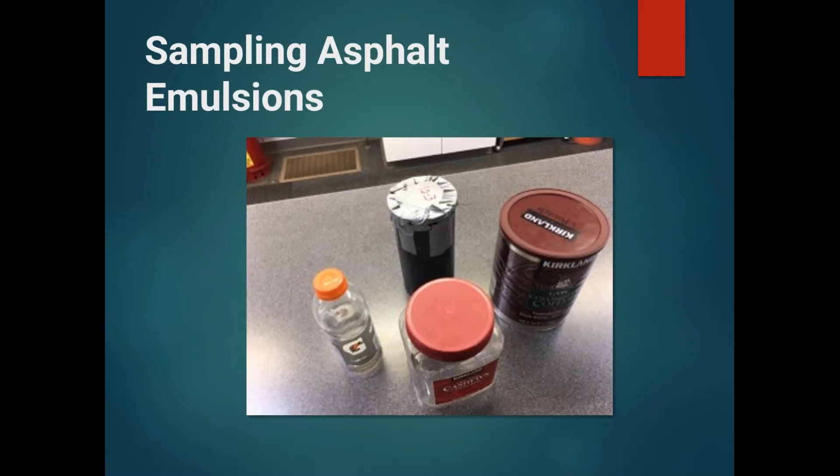The purpose of sampling is really to obtain samples that truly show the nature and condition of the material that's being put down on the road. And test results are dependent upon proper sampling. If you go out and you take a bad sample, you're going to get bad results, and it's not going to truly be a reflection of what the material was that you received or applied to the road.

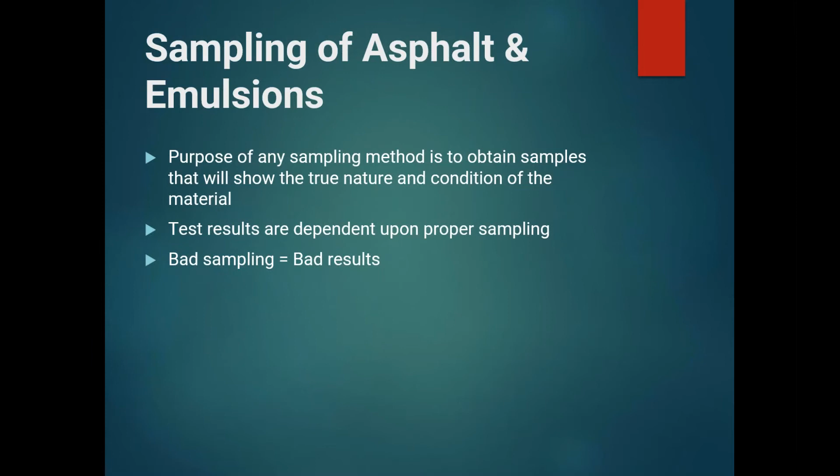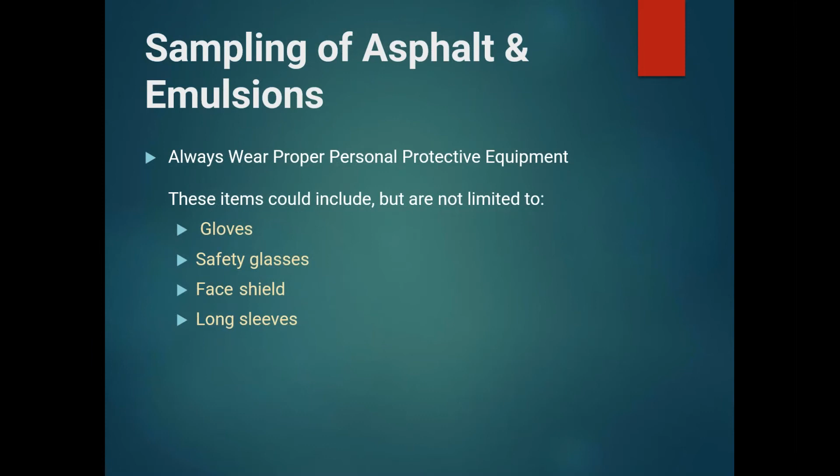So the first thing I want to talk about when you go out to pull a sample is PPE. That's proper personal protective equipment. You always want to make sure that you are wearing the proper equipment to take a sample safely. And those items are usually things like gloves, safety glasses, a face shield, and then long sleeves. Safety is always my first concern.

Now, with just 20 minutes to discuss both sampling and emulsion testing, I'm going to cover the highlights, but for more detailed information, two great sources of information on sampling procedures are AASHTO R66, which is sampling of asphalt materials, and also ASTM D140, which is the standard practice for sampling asphalt materials. Both of these provide additional information on proper ways to sample asphalt and emulsions at production facilities, storage facilities, and the point of delivery.

Most agencies and companies have sampling policies and procedures. And these procedures a lot of times will contain information on the proper sampling location, where they want the samples taken, how often samples need to be taken, the type of containers these samples should be taken in, and also PPE required. So when you're taking samples, make sure that you are meeting and understand the requirements of the applicable agency or company that you're pulling them for.

Andrew just spent some time talking about the production facility and making the emulsions. So where are some typical places that you would pull a sample at that production facility? He showed pictures of storage tanks. Most storage tanks will have a sample valve on the tank itself that makes it very easy to get a good sample. Some production facilities may have a circulating line where you're able to circulate the material in that tank through a line and pull a sample off that line of the material flowing.

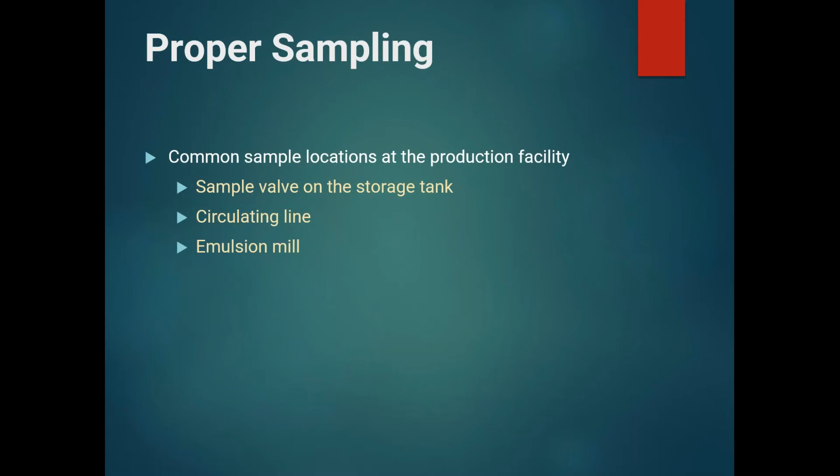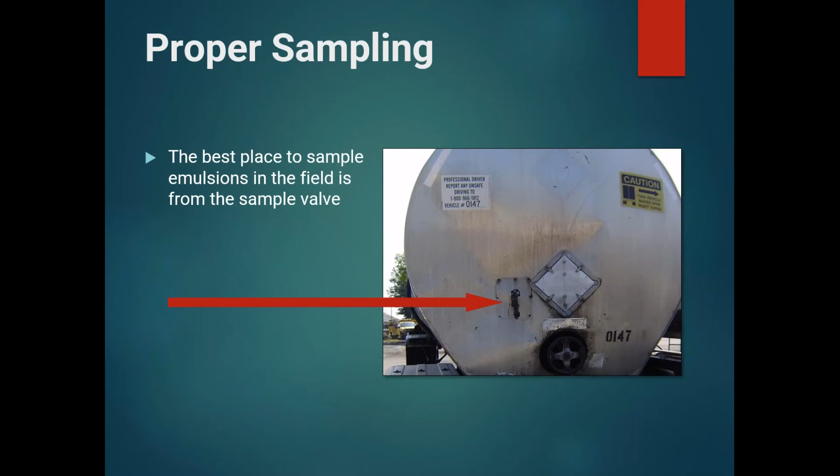Now, when you're in the field, sample valves are still one of the best places to take your proper sample. So this is a picture of a tanker, and on the back here is a sample valve. And that goes the same for a distributor. Sometimes these sample valves may be clogged, or you're unable to get sample to flow from them. And when that happens, what do you do if there's no sample valve or if it is clogged? A lot of times people may take a propane torch and heat that sample valve up to get that material flowing, but that doesn't always work either.

There's also adapters that you can buy that you can attach where the pumping hose connects to the truck. And these adapters, this is an example of a screw-on adapter and a quick connect adapter, allow you to collect a sample still from that sample valve.

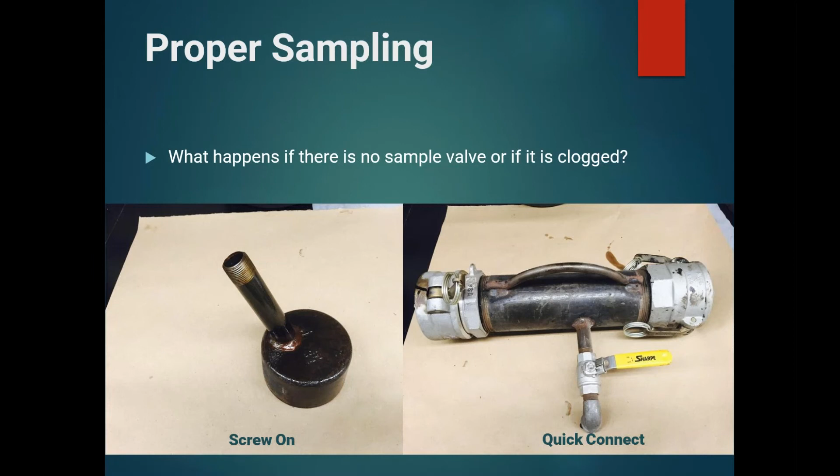Taking samples from the spray bar is not really recommended on the distributor. It does happen sometimes. The reason that's not recommended is because the emulsion has already been sprayed through a nozzle, and this can impact the liquid properties of the emulsion.

Samples from the spray bar can also become contaminated from whatever was used to clean the spray bar. So just be aware that if you do sample from the spray bar, take that sample after approximately 1/3 of the load has been sprayed, and ensure there's no pressure on or in that spray bar from the pump before you pull that sample.

When you do pull the sample, whether you're taking it from a valve or a spray bar, you want to make sure that a minimum of 1 gallon of material has run through that sample valve and been wasted before you begin collecting your sample. And that's to ensure that you have no contamination in that sample from whatever's left in the valve last. And then all emulsion samples should be collected in new wide mouth jars or bottles made of plastic or wide mouth plastic lined cans with lined screw caps.

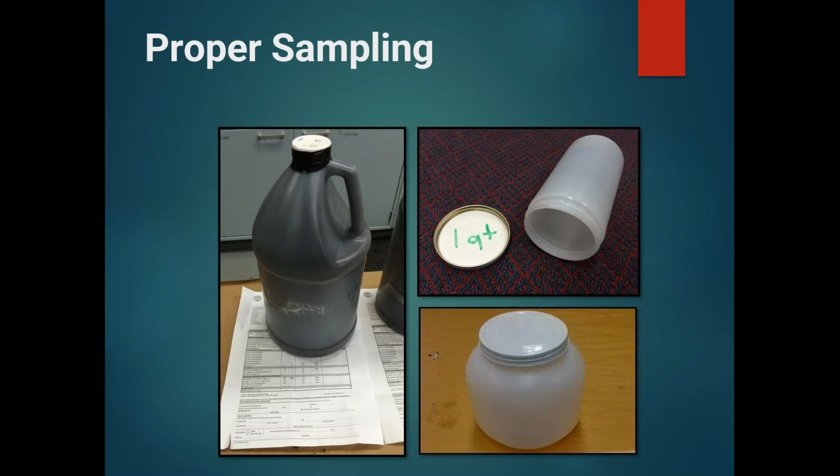So this is a picture of just an example of some containers we do like to see used for sampling emulsions. You have just a typical gallon jug container. The reason the wide mouth is preferred is because when that gets into the lab, it's just a lot easier to take that lid off and actually stir the emulsion itself and make sure that it's completely homogeneous. It's a little bit harder to get a small opening stirred up well.

Emulsion samples should not be taken in containers that have been previously used or in metal containers. The metal itself can interact with certain types of emulsions and cause some instability of the emulsion just in the container itself. These are some examples of containers that do get used in the field and that we do see in the lab. Again, all of these are just a source of contamination. You can contaminate your emulsion before it ever gets to the lab to test.

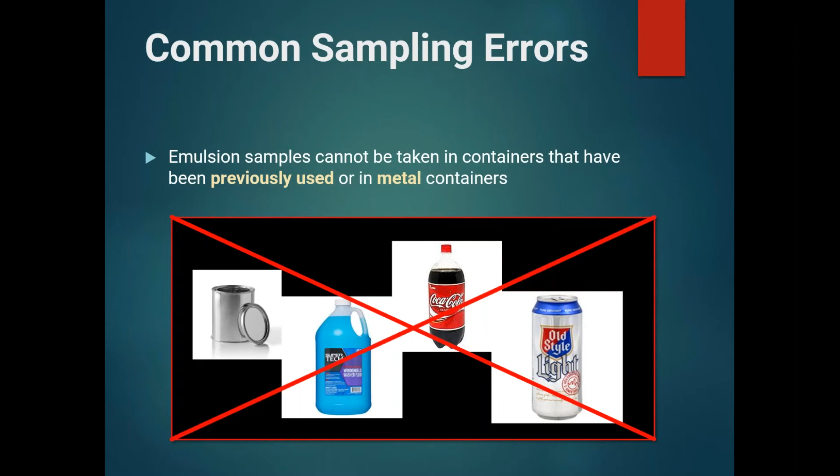One thing we do see, obviously, people are staying really hydrated out in the field because we see a lot of samples come in Gatorade bottles. So hydration's good, Gatorade bottles, not so good.

When filling up the containers, they should be filled completely to eliminate possible crusting or skinning of the emulsion that can show up as sieve when it gets to the lab, excessive shaking from having a lot of empty space, or condensation in the container. When filling the containers, you want to avoid filling them too quickly because you may entrain air in that sample. Also, samples should not really be exposed to direct sunlight or allowed to freeze.

So if you pull that sample, don't throw it in the back of your truck and drive around with it for a week before you think to send it to the lab. That's not going to be the best sample for testing when it gets here.

And also, samples should not be submerged or wiped down with solvent. Again, the solvent that's left on the outside of that bottle can possibly contaminate the emulsion itself when we're pouring it up. And a lot of times these containers get put in water baths or ovens, and those can contaminate the water bath as well. Just use a clean, dry cloth to wipe off the container as best as possible if needed.

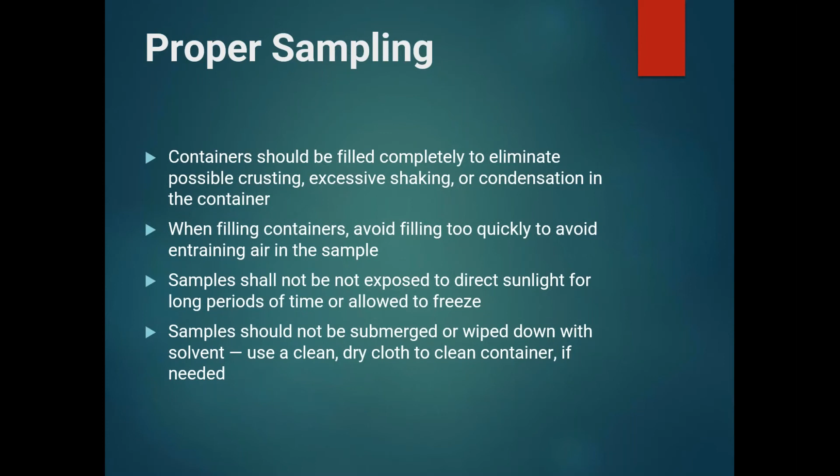Once you have your sample and it's filled up and you're ready to send it in, we should make sure that the sample is labeled with, at minimum, the following information. And that would be your product name, the sample date, sample time, sample location, and the sampler's name.

We often ask that you put that label on the side of the container, and the reason for that is if you have a lot of samples in a lab and people are taking lids off and pouring up, testing with the emulsion, it's very easy for lids to get switched. And so if you do label the lid, just ensure that you label the side as well. And any additional information, the more information on a sample, the better. So additional information like the project number or tanker number or anything else is always useful.

So once you have your sample labeled and it's ready to be sent into the lab, you want to package it and ship it to the lab the same day that the emulsion sample is taken, if possible. That's ideal. On the picture that I showed earlier of the gallon jug, you might have noticed the black electrical tape wrapped around the lid.

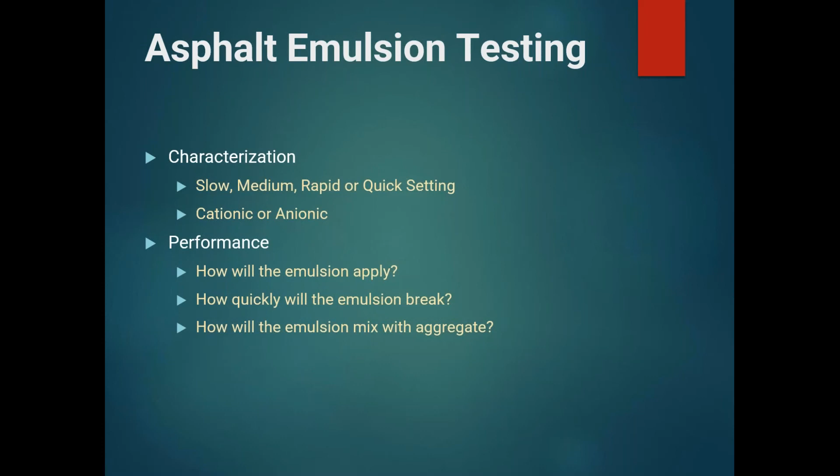And then the second category is performance. How will this emulsion apply out in the field? How quickly will the emulsion break? And how will this emulsion mix with aggregate? Some of the very common characterization tests are demulsibility. You may hear this called demulse. This test is used to identify rapid setting emulsions.

Basically, you take a soap of the opposite charge of your emulsion. So if you're testing a cationic emulsion, you'll have an anionic soap, and you mix that together and look for a certain amount of that emulsion to break out. And by each of these tests, I've also listed the AASHTO or ASTM procedures, so you can go back and read more about these later if you want to know more about how the test is run.

A second characterization test is cement mix. This is used to identify slow set emulsions, and in this test, you basically mix cement with the emulsion, and it needs to be a slow enough emulsion with enough chemicals to mix and stay fluid when mixed with cement. And then the last one I have here is a particle charge test. This test is measuring for a charge on the emulsion itself, and it's used to identify cationic emulsion.

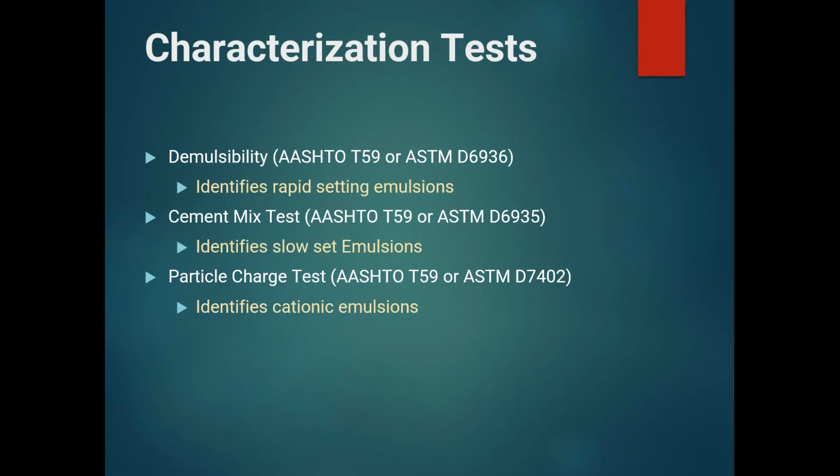Application tests. One of the most common ones that you'll hear mentioned is VIS, short for Saybolt viscosity, and another method of testing that is the paddle viscosity. Both of these tests are measuring the rate of flow of emulsion. How thick or thin is this emulsion, and is it appropriate for the given application?

Is the emulsion thick enough so that when you apply it on the road for a chip seal, it's not going to run off and it's going to stay there for aggregate to be dropped on? Or is it fluid enough that you're going to be able to mix it with rocks before it's laid?

Another application test is sieve, and Andrew mentioned that one. This is where we're measuring the uniformity of the emulsion by looking for oversized particles. So are there a lot of oversized particles that may clog your equipment or cause you problems when applying this emulsion? And then coating ability and water resistance.

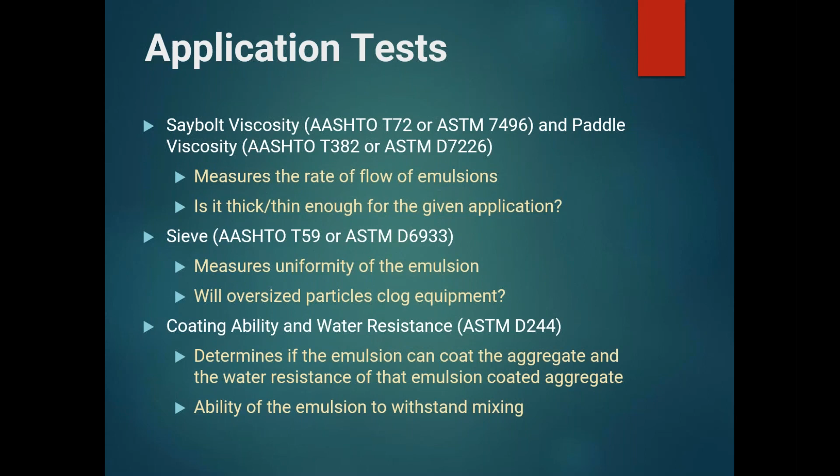This determines if the emulsion can coat the aggregate and if the water resistance of that coated aggregate is where you want it to be. And then also the ability of the emulsion to withstand mixing. Those were the tests that are really done on the emulsion when it's still in its emulsified and liquid form.

The rest of the tests we're going to discuss are done on the actual residue of the emulsion itself, so just the asphalt portion that you want to recover. So there's three basic ways that we recover residue from an asphalt emulsion. The first one is called residue by distillation. This is the quickest way to recover asphalt residue from an emulsion, and it's typically performed at either 177, 204, or 260 C, and it takes about an hour. And this residue recovery method will also provide you with an asphalt content percent, how much distillate content is in the emulsion, and also provides you then residue for performance testing.

The second method is residue by evaporation. This is where the emulsion is poured into metal cans or containers and put into a 163 C oven for 3 hours. This provides you just asphalt content. You will not get a distillate percentage from this test. And it also provides quite a bit of residue for performance testing.

And then one of the newer methods for recovering residue is called low temperature evaporation. This recovery method is really trying to simulate what happens when you take an emulsion out and you put it on the road, and the lower temperatures that the asphalt emulsion itself will be subjected to. Basically a thin film is drawn down on a silicone sheet, and then that's put into a 60-degree C oven for 6 hours to give you a smaller amount of residue that's usually used for testing like the multiple stress creep recovery and original dynamic shear rheometer.

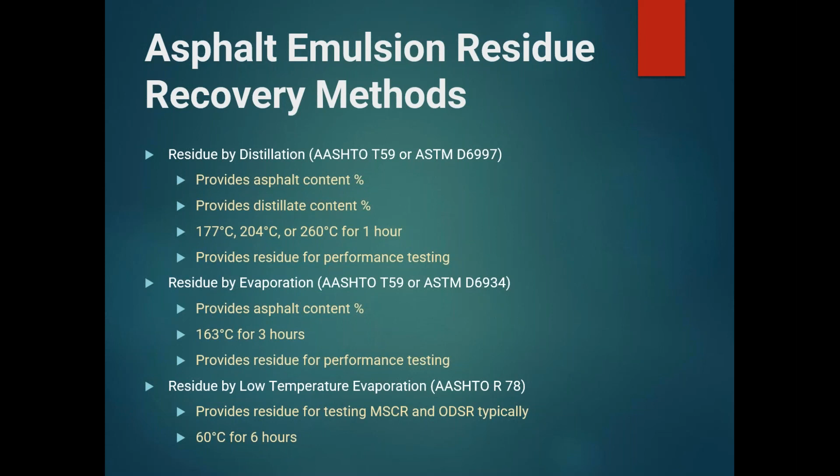Some of the other tests, a few of these have been mentioned in some of the previous discussions. Some of these tests are penetration. So penetration, or you may hear it called PEN, is basically measuring the consistency of the asphalt by how hard or soft this asphalt is at a given temperature. Then there's ductility. Ductility measures the tensile properties of the residue, and this is determined by how far a sample will elongate before that sample breaks.

Float test is an interesting test because it's a residue performance test, but it's also a little bit of a characterization test. There's a category of emulsions called high float emulsions, and so this float test characterizes the flow behavior of high float emulsions, typically at 60 degrees C. So if you have a high float emulsion, this will typically be part of the specification to test and ensure that it does actually meet the high float requirements. And then also absolute viscosity, and that determines the apparent viscosity of the residue itself.

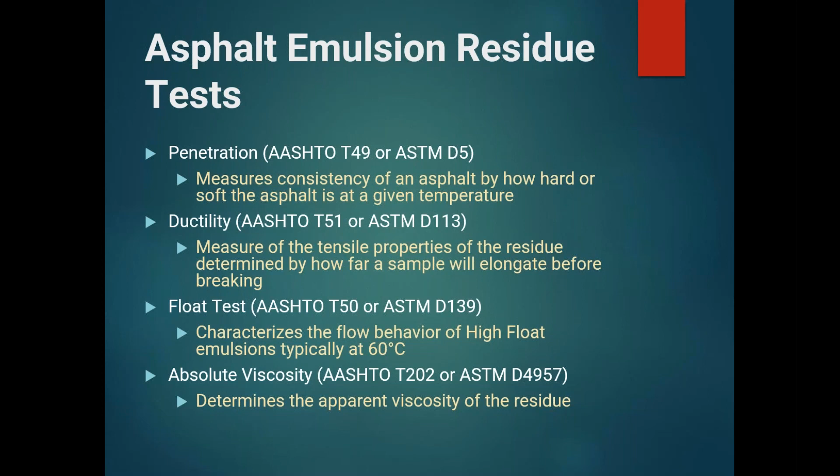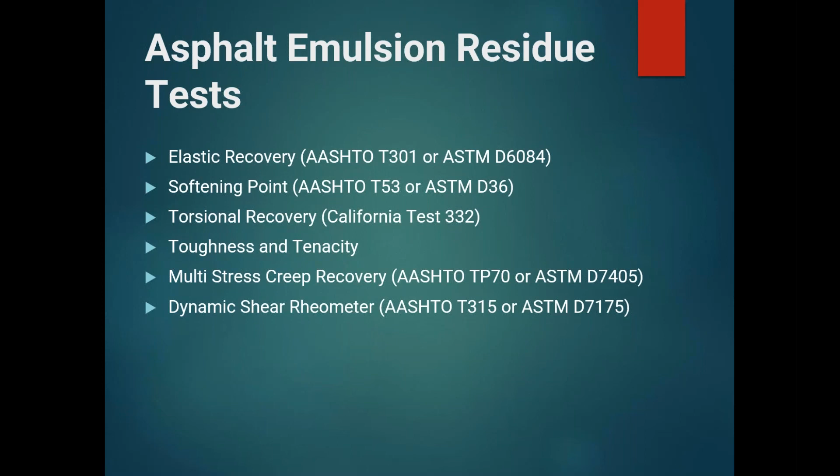This next category of tests are performance tests, but all of these are used to indicate the presence of polymers. CJ talked a lot about polymers, and so agencies have specifications in place to ensure that appropriate loadings of polymer are present in the asphalt emulsion that they're purchasing to give them the specific performance that they want. Typically, you'll see one or possibly two of these tests specified for anything that is a polymer modified emulsion. These tests are elastic recovery, softening point, torsional recovery, toughness and tenacity, multiple stress creep recovery, and also the dynamic shear rheometer. Solubility and ash are both used to test for the presence of deleterious materials in the residue.

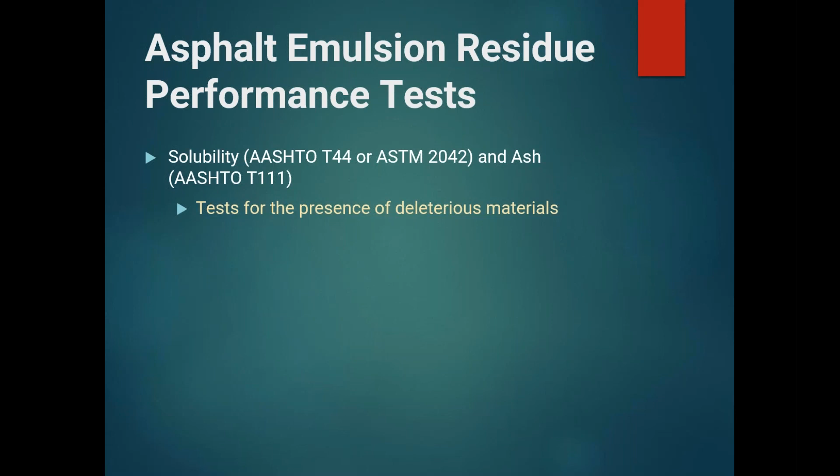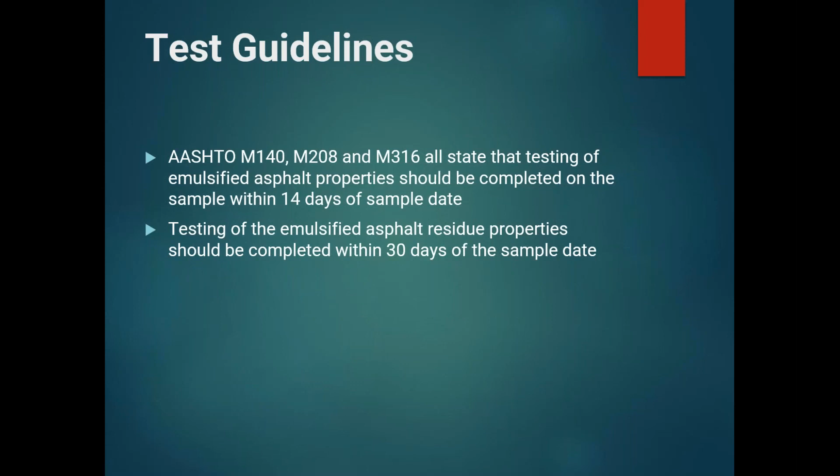AASHTO M140, M208, and M316 are all emulsion specifications for the anionic, cationic, and polymer modified emulsions. And all of these state that testing of the emulsified asphalt properties should be completed on the sample within 14 days of sample date. That's one of the reasons that it's important that as soon as that emulsion is sampled, it's sent in to the lab on the day it's pulled, because the clock starts ticking on that day. And then also the testing of the emulsified asphalt residue properties themselves should be completed within 30 days of the sample date.